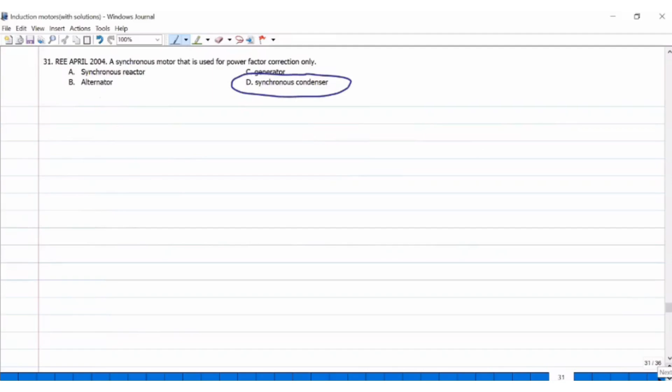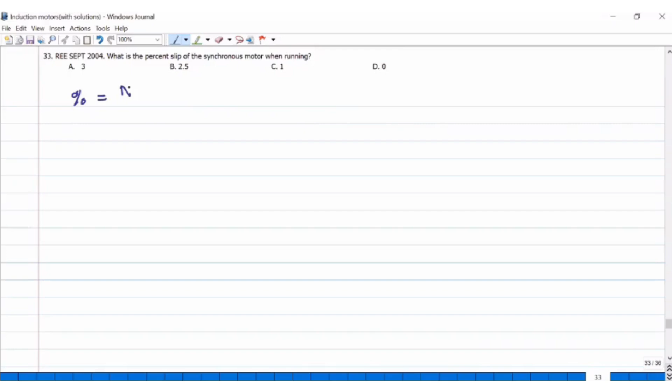Then 33, what is the percent slip for the synchronous motor when running? What is the percent slip? NS minus NR all over NS. Yung rotor niya, it will also run at synchronous speed. So therefore, it is 0. Walang pagkaiba yung synchronous speed ng source doon sa speed ng rotor ng synchronous motor. Kaya 0

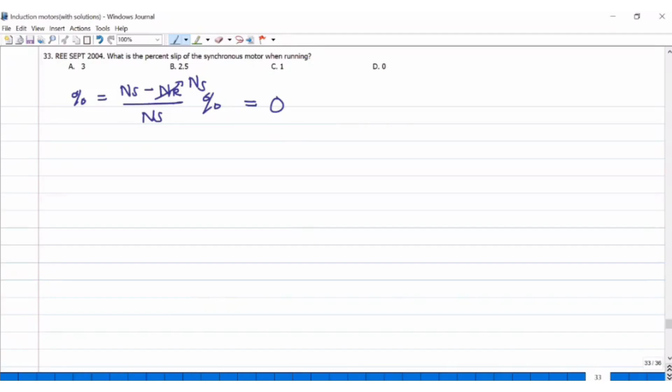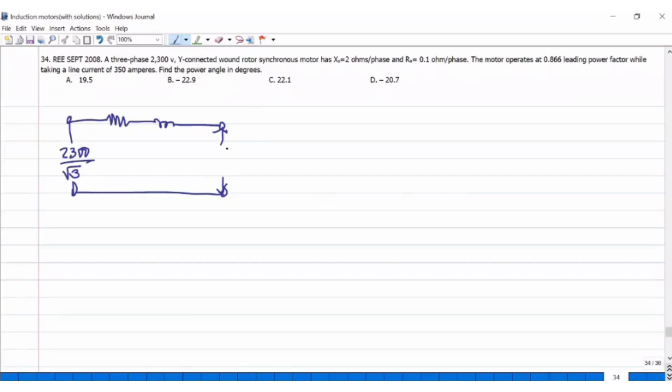ang slip. Number 34, a 3-phase 2,300 volt Y connected wound rotor synchronous motor has Xs of 2 ohms per phase and RA that is 0.1 ohm per phase. The motor operates at 0.866 leading power factor while taking a line current of 350 amperes. So find the power angle in degrees. So kung motor, ito siya. Ito yung source, 2,300 over square root of 3. Then dito naman yung back EMF of the motor.

34. Ano na yung EM per phase? Pag nag-loop tayo, yung current pag ganyan, so positive, negative. So EM per phase is the terminal voltage. Ito yung magiging reference natin. So 2,300 over square root of 3 minus tayo. Parang back EMF ng DC motor. So ito yung back EMF ng synchronous motor. Kaya minus 350. Then power angle. So yung resulting angle dito, yun yung magiging power angle. Angle negative, positive. Arc cosine 0.866 times 0.1 plus J2.

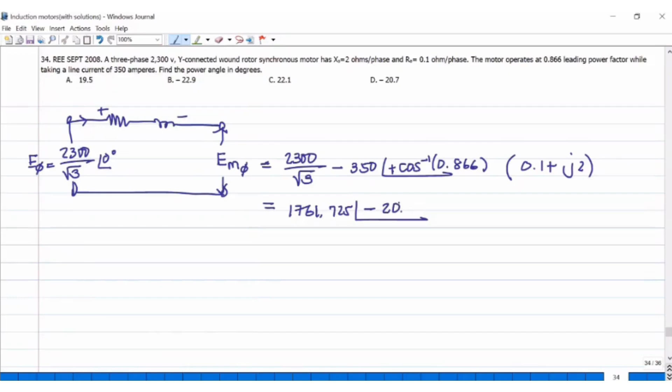Then mode 2-3. Per phase minus 350, angle shift cosine 0.866, times 0.1 plus 2J equals, shift 2-3: 1761.725, angle negative 20.734. Ito na yung hinahanap natin. 20.7 degrees.

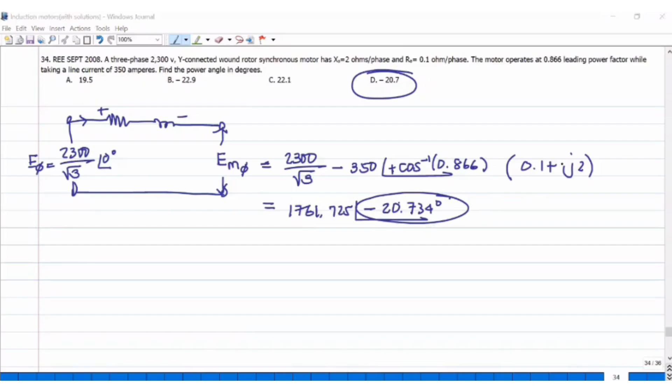35. The full load losses in a 5,000 kVA 3-phase 6,600 volt synchronous condenser are 160 kilowatts. Calculate the full load current and power factor. So I full load. So 5,000 kVA divided by square root of 3 times 6,600. Naka-volt ampere yan, kaya hindi na natin i-divide ng power factor. So 5 exponent 6 divided by square root of 3 divided by 6,600. 437.387.

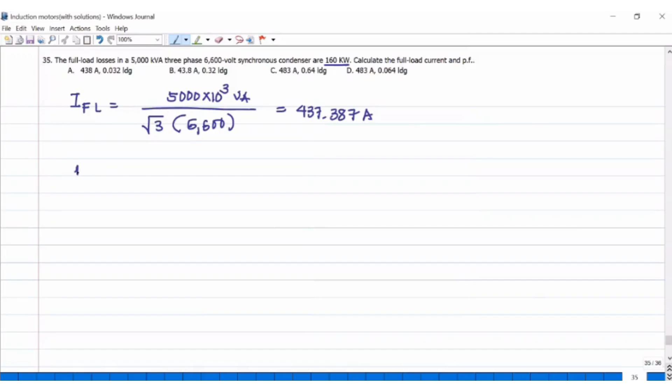What is the power factor? Condenser? Baka ito yon, yung power factor. Okay. Power over apparent power. Ito na rin yung power delivered, 160, kasi yan din yung loss niya. So yan din yung magiging output niya. 160 kilowatts divided by 5,000. Cancelled yung kilo. 160 divided by 5,000, 0.032. So letter A.

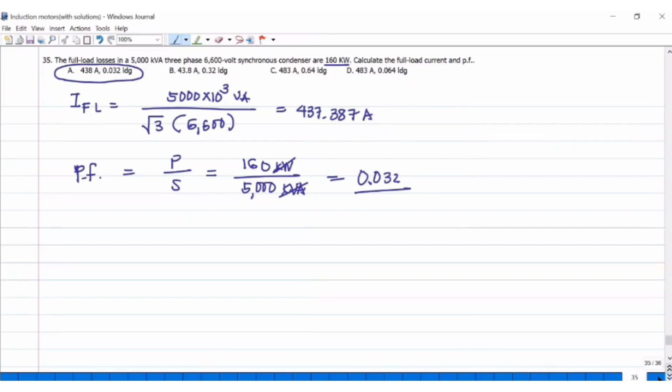Okay, ito na yung 36. Excited kasi ako. Yan yung pinakamahirap eh.

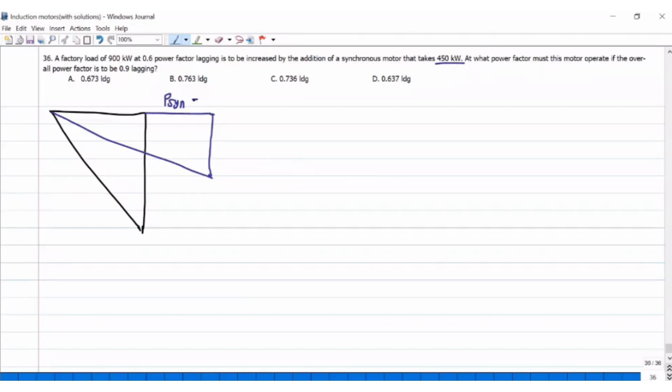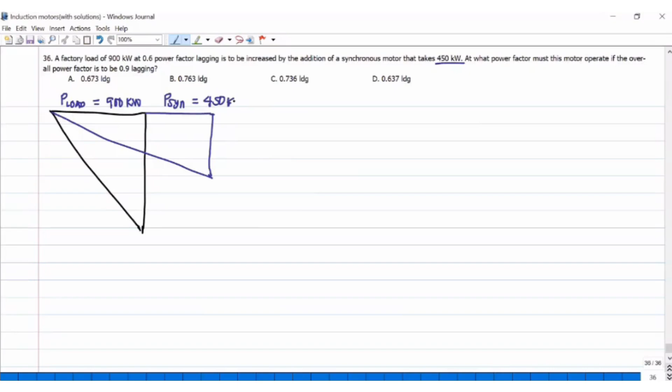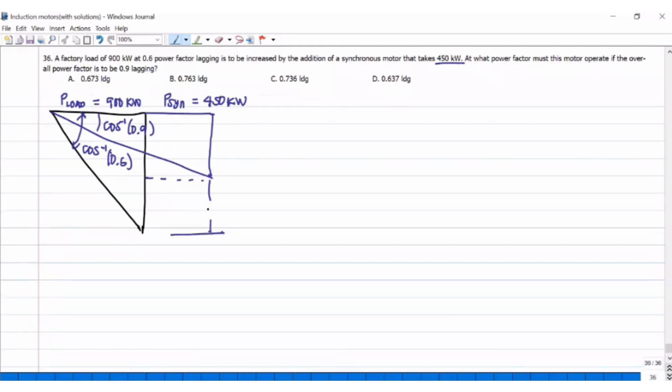Factory load of 900 kilowatts at 0.6 power factor lagging is to be increased by the addition of a synchronous motor that takes 450 kilowatts. So yung P synchronous motor is taking 450 kilowatts. So nandito siya sa hilera ng induction motor o yung load. 900 kilowatts. Tapos ito, arc cosine 0.9. So ito naman yung arc cosine 0.6. So what power factor? Ito yung binawas, ito yung Q of the synchronous motor. Okay, pwede nating ma-solve yung Q. Ito, yung length na yan. So that will be PT2 times tangent of power factor 2. Yan, this triangle. So magsasama yung 450 at saka 900.

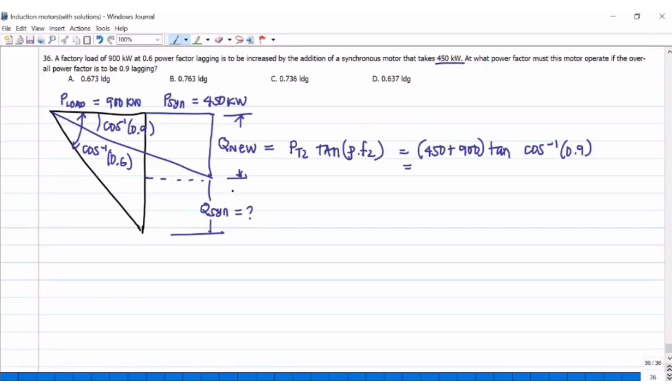Then times tangent of arc cosine of 0.9 is equivalent to, so yung triangle na to, ito yung Q old. Yun yung buong length na yan. So 900 tapos arc cosine 0.6. Solve muna natin yan. Ano yung value? 450 plus 900 times tangent shift cosine 0.9 equals 653.835 kVAR. So yung Q old, you follow that formula, 900 times tangent of arc cosine 0.6. Pero mas mataas siya sa 653 siguro. 900 times tangent shift cosine 0.6, 1,200 kVAR.

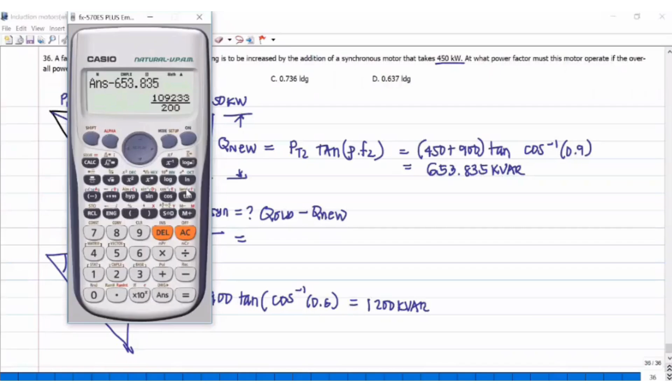Ano yung Q na sinupply? Yung reactive power na sinupply ng synchronous motor. That is Q old minus Q new, which is equivalent to 1,200 minus 653.835. So 546.165. So yung synchronous motor, meron siyang true power na na-consume 450. Tapos ito naman yung kanyang Q. Separate natin yung power triangle ng synchronous motor. So ito ay 546.165. So ano yung magiging power factor niya? Kunin natin yung theta ng synchronous motor, yung power factor angle niya, so it will be arc tangent of 546.165 over 450. Then after getting that angle, you get the power factor by getting the cosine of the resulting angle for the synchronous motor.

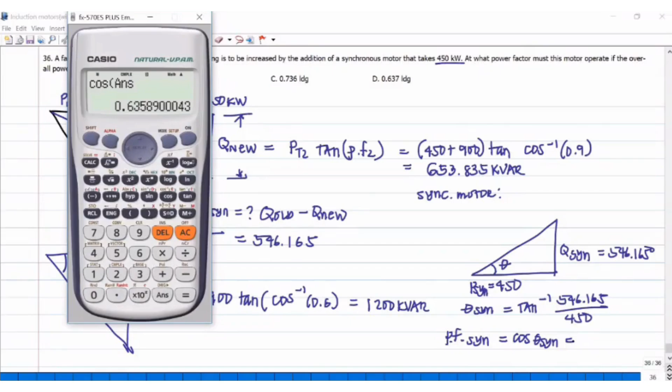So equivalent to 546 divided by 450, shift tangent, 50.514, then you take the cosine, 0.636 leading. So letter D. Okay? Kaya lang naman yung mga binibigay sa induction motors, yung slip, rotor speed, yan. So bibihira na yung ganitong mga problems.